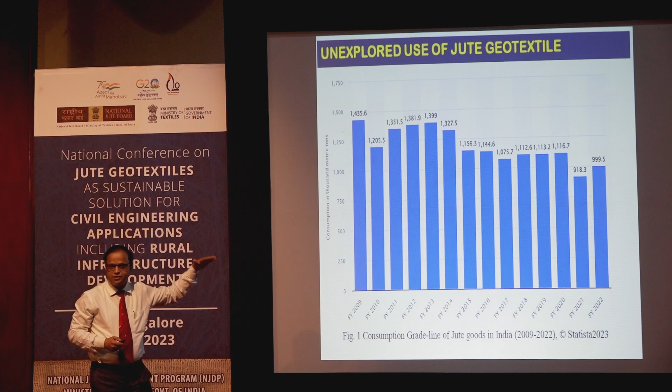So if you see the jute industries, this is the grade line, comprised of all the jute related goods. But I don't have data for the jute geotextile. I think that will be the elevated line. If data is there, it can be put in Excel, it will be elevated. So this is the new innovative material on which, in the last 30 years, a lot of work has been done. And now for us, it is not innovation because it is already established.

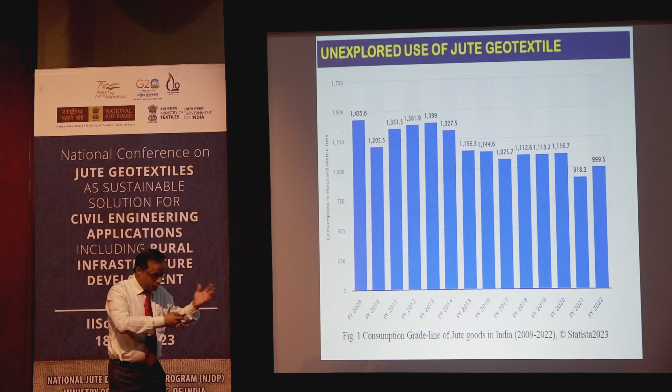But I'll discuss in detail what is happening on the ground, from junior engineers to chief engineers, because we have to connect with them, communicate with them. There are sufficient problems I found, which I will address here. So these are the questions in our mind, which everybody is having. I am convinced that all here are expert scientists.

So just to remind on that, in rural infrastructure like MGNREGA roadworks, etc., do we see the use of jute geotextile? I don't find any in MGNREGA; they simply make an earthen road. We can just place a jute geotextile. This is a potential area of use. In PMGSY roadworks, we see the use of jute geotextile in a very low percentage. These questions are already in mind; the previous speakers also mentioned this point.

Is there any target, goals, achievements, or consistency that satisfy the requirements of green infrastructure? So I think National Jute Board is the leader to take jute forward, and we all are with them. For that we need a system. Obviously a robust system is existing. But are these things organized in the latest manner, with all the communication devices and tools properly?

In riverbank protection works and water body restoration work, how much JGT is getting used? I am from the state of Tripura, the 3rd smallest state in India; it is equivalent to a district in West Bengal. There I can see enormous possibilities to use jute geotextile consistently. Not just when a project is coming and we are taking up the project design. It should be consistent. That should be our goal. Consistent use shall be the practice.

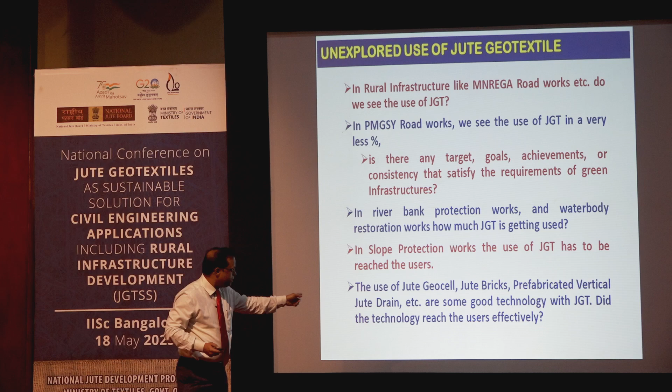PVJD - these are good technologies with JGT, but did the technology reach the users effectively? This effectiveness is the question now.

In 2007, with Mr. Chaudhary, I visited some chief engineers. They didn't believe us - first of all, they didn't believe me. So I took them with me. They said no, it will be degraded.

It is already 16 years now. I believe the next boosting is ready for us. The next sensitization is important - the next milestone we have to reach.

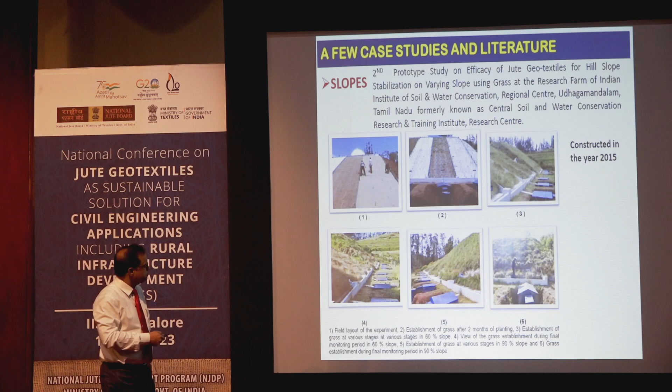This is one of the roads under PMGSY. This road was constructed in the year 2017. Now see the sustainability points - the constructed road length is 3 kilometers, constructed in 2017. Cost saving is 2.25 lakh per kilometer. Energy saving is 1187 gigajoules per kilometer. CO2 emission reduced by 266 tons - the reduction in CO2 emission is 1.2 tons CO2 per ton of JGT used.

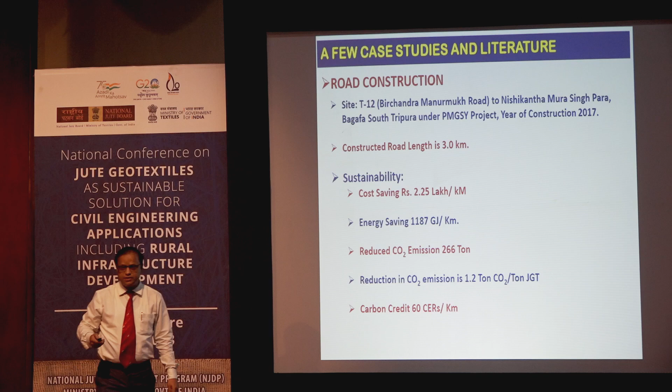How much JGT will be used per ton? 1.2 tons of CO2 will be reduced. If we calculate the carbon credit for that - you should know carbon credit is a future business, like the stock exchange business going on for the energy scenario - we can achieve 60 certificates per kilometer minimum. It should not cross below 60; it will be more than that.

So this is the cross section, if you look into it. This is the proposed sub-base with two layers of sand, 25mm and 25mm. Then we are putting the Jute Geotextile, then WBM 2, WBM 3, then the PMC. GSB, WBM 2 and WBM 3 - this is the order.

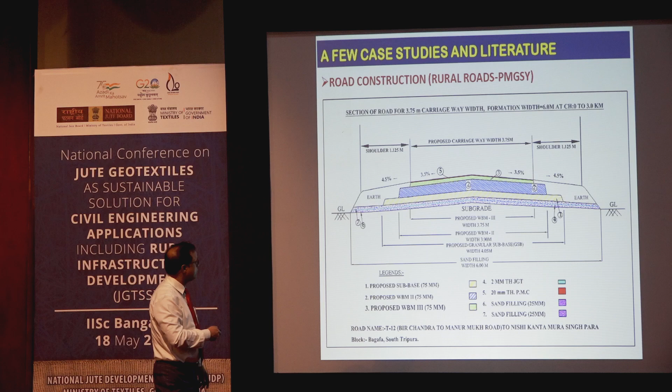This is the condition of the road before construction. This is the laying of Jute Geotextile - you can see NJB and IJIRA people are there, they were invited. This is the present condition, the latest from May 2023 - so it's almost 6 years.

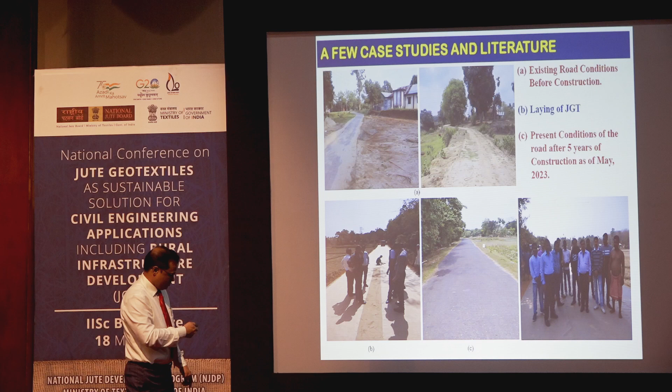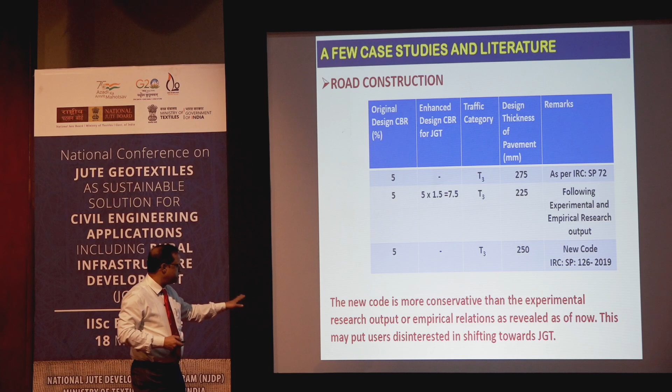This may make users disinterested in shifting towards JGT. I was associated with this new code work from NJB. There were two things in debate: one is the empirical approach, another is the mechanistic way to design from the initial reinforcement approach. At the last moment, the mechanistic approach was considered. So we are losing 25mm - we had saved 50mm in the earlier empirical relations, but now we are losing 25mm of that benefit. This needs to be looked into during upcoming revisions.

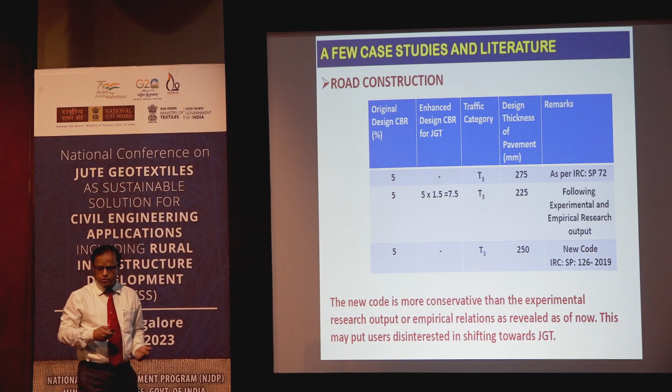This is very important, I feel, because reinforcement checking for JGT is not sufficient - reinforcement checking for other geotextiles is not similar to Jute geotextile, as Professor Madhavi Latha also mentioned. We need to discover what is happening in the interactions between the Jute geotextile reinforcement and the soil interface, because all experimental results I took show a minimum enhancement of 1.5, not lesser than that. Why should we not take that benefit? This is something we can save more on.

Now this is another road - it was an MDR, Major District Road, then converted to a state highway. It was constructed in 2008 for a design period of 1 MSA, with design CBR of 5%. This was actually just a 200 meter stretch on one side - only 200 meters with Jute geotextile kept in the interfaces, with different provisions in the interface. The other side was kept with no JGT used.

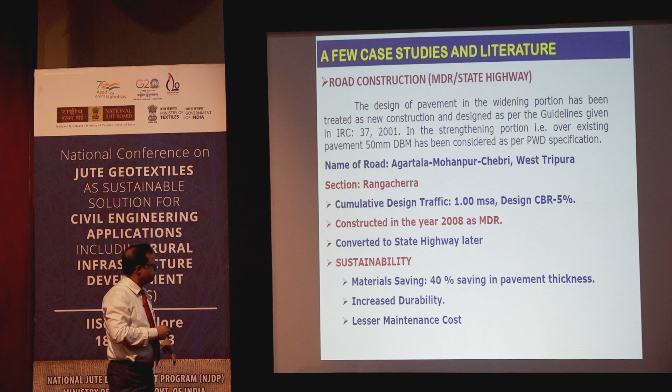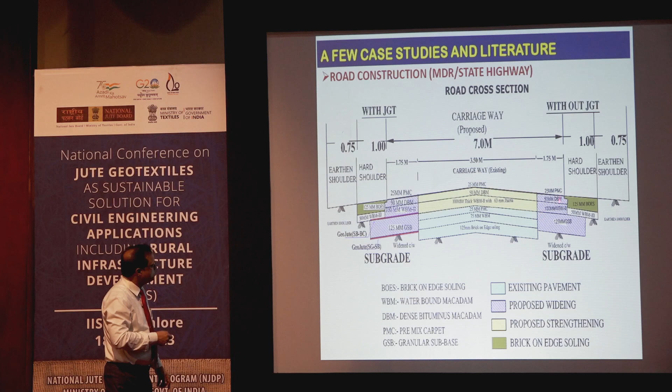So what has happened? Now for design as per IRC 37, if we use this, we are supposed to give 430 mm for the combination of CBR and the 1 MSA design traffic. 430 mm we are supposed to give, but we have given only 275 mm.

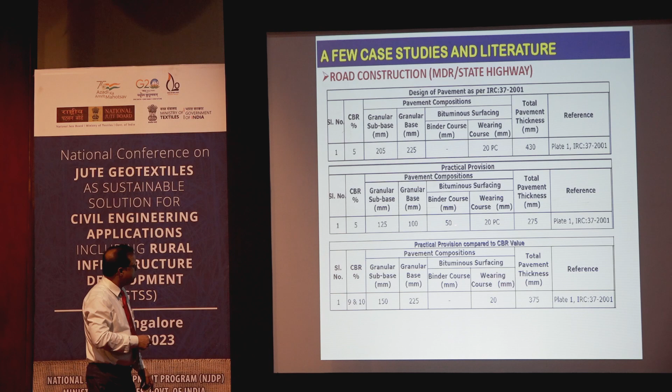If we consider the enhancement like 9 and 10 category, then it comes to GSB 150, granular base 225, total 375. This is if we consider the enhanced CBR. But we have to consider this because 50 mm BM bituminous macadam we are providing there. So we have reduced around 100 mm in the practical provision. So what happened?

This is the installation of jute geotextile. You can see, at that time it was 2008.

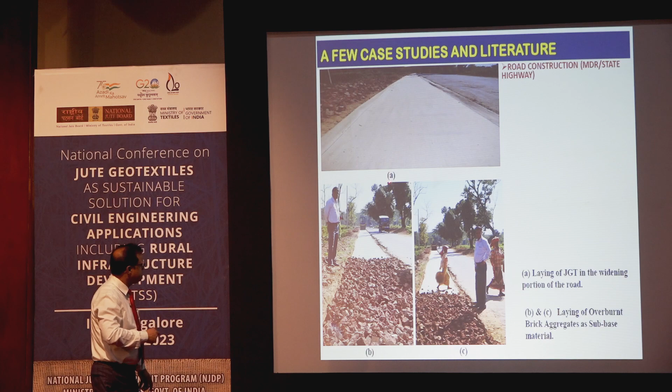This is the conducting of Benkelman beam deflection tests. We have conducted several such tests, and these results are also demonstrated in a paper communication. Some rutting observations are going on in a different manner, and less than 3 mm rutting we received.

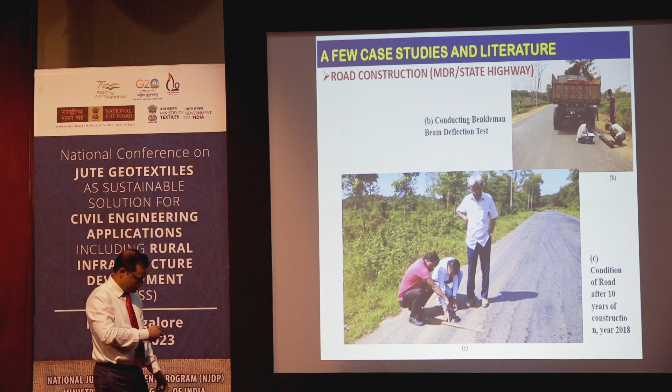Less than 3 mm. This is the 2018 picture. You can see Professor Ranjan Chakraborty visited there from Jadavpur University at that time.

Infrastructure was increasing 20 years back also, infrastructure is booming way up, we have been hearing this from 20 years back. But now there is a difference. The difference is that we have to get into sustainability, sustainable infrastructure development.

Target users of jute geotextile are largely government projects. Effective coordination with the planning section of the engineering department shall be ensured.

Customer support mechanism for JGT shall be developed along with easy apps connecting users, consultants and contractors in a single app. I don't think any app is there till now. So an app, now that Internet of Things are there, the app will keep us connected.

So anytime a junior engineer can know which specification has to be used, without needing to talk on mobile and connect to somebody. Feedback mechanism shall be effectively introduced, introducing the latest IoT aspects.